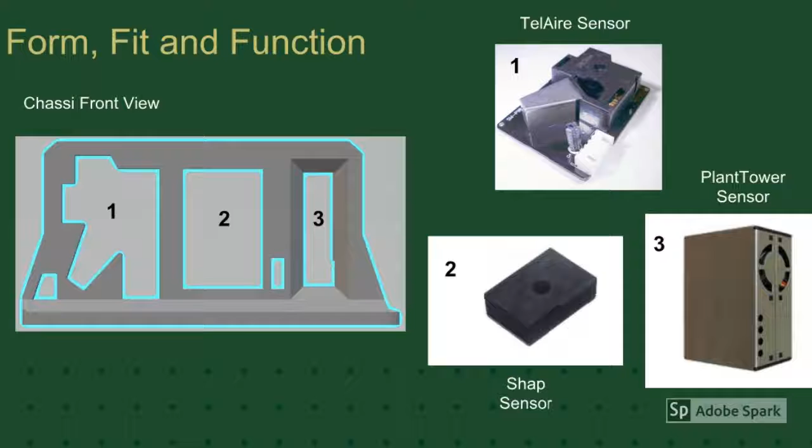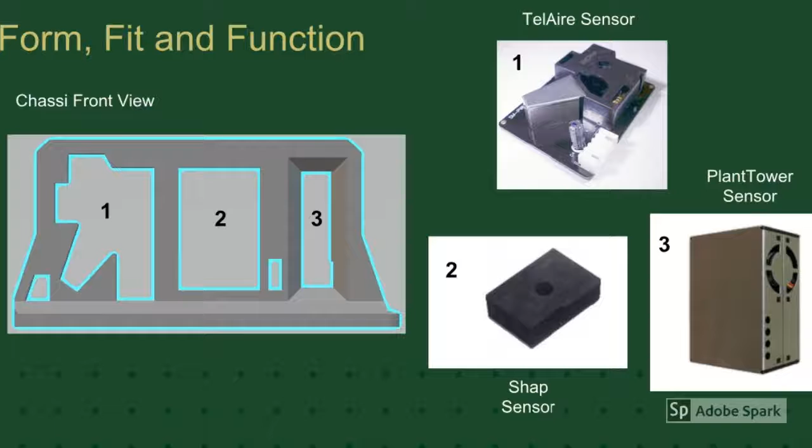Form, fit and function. Here to the left, the front view of the chassis shows where the three main sensors are located. The sensor marked as 1 was the most time-consuming to model since it has a particularly irregular shape. As mentioned before, additive manufacturing was ideal for creating a part around this sensor. The other two are marked as 2 and 3 - these were easier to model, but they still have irregular geometry.

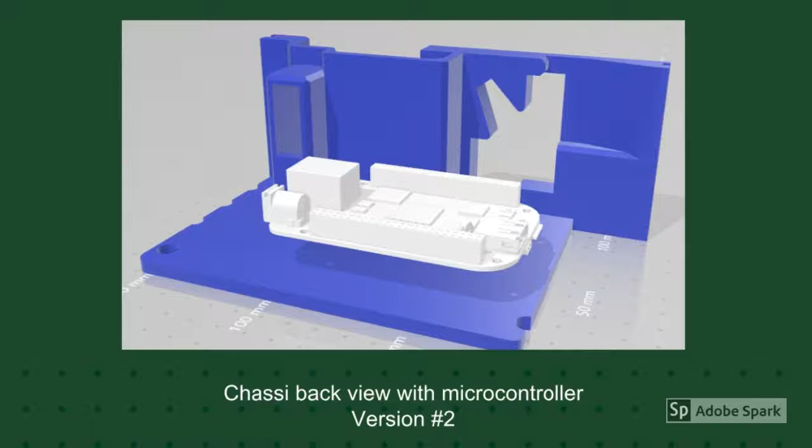In this next slide, the back view of the chassis can be seen. On the back, the placement of the microcontroller can be seen - it is the object in white color. This is not my model of the microcontroller; this model was found online. It has some amazing detail - I can't imagine how long it took for someone to make, unless they used some laser scanning to produce it.

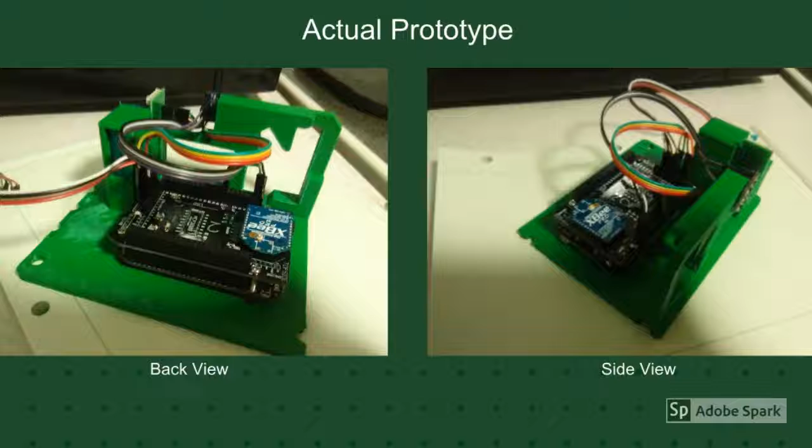Here are some pictures of the actual prototype with some sensors and the microcontroller on it. This is the final revision for this semester. The filament used was PLA. PLA was used mainly because of the cost, and because it was an easy material to work with. In addition, PLA could be used on a number of printers I had access to, from the Senior Design Lab for Electrical Engineering and a personal printer.

Features and highlights. As mentioned before, the material used was PLA.

It took around 11 to 12 hours per chassis to print with a profile of 0.15 mm, with a weight of 94 grams. The smoothness of the chassis was not a constraint, but after some experimentation, this profile was easy to work with, and it helped reduce the printing time of the units.

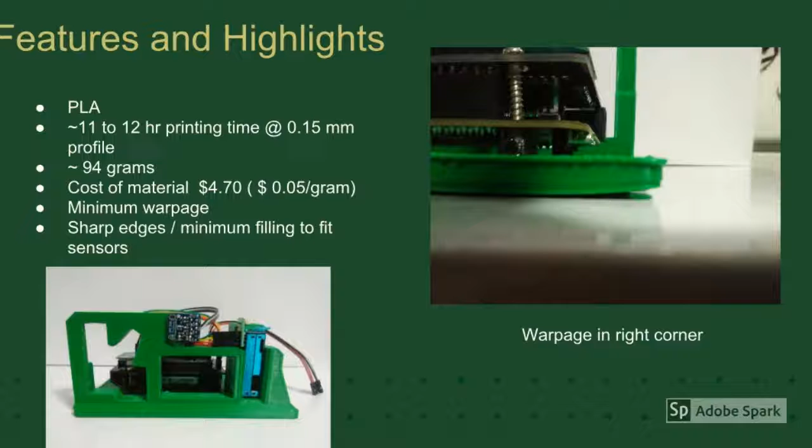Weight was also not a constraint for this project. The printing time was long for one piece, but a lot shorter than sending it to be manufactured off-campus. Time was a little more of a constraint because of the number of units needed for her project, and the deadlines.

The cost of every unit was $4.70, a cost of 5 cents per gram, well under the budget designated for chassis on the project.

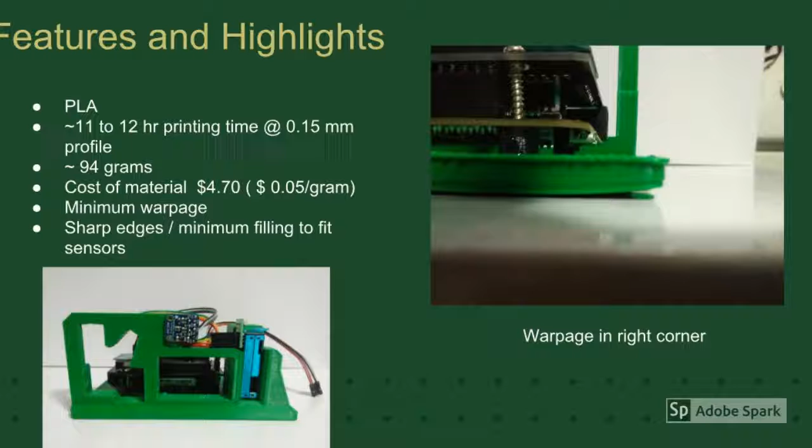There was minimum warpage on the chassis, as can be seen in the picture. I tried using different bed temperatures and blue painting tape to reduce the warpage on the models. However, the corners had the tendency to develop some warpage. It would have been perfect to have no warpage, but the amount of imperfection was not critical for the performance of the unit.

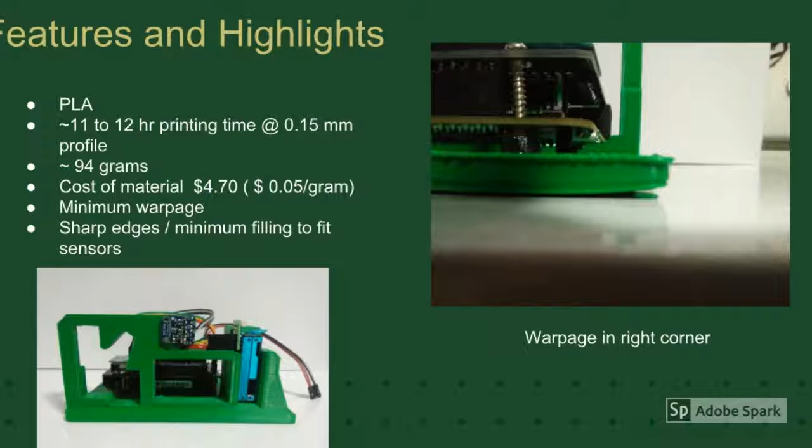The edges were sharp and required minimum filing to fit the sensors. The main reason for needing to file was to remove residual material from the supports created for the floating sections on the model.

One highlight I'd like to mention is that by splitting the model in half, I could use different printers with smaller bed sizes. I used a TAZ 6, where the model fit without a problem, a Mini from the Senior Design Lab, and my personal PowerSpec, where the bed size is smaller and the model could fit if cut in half.

As the project needed a total of 12 chassis, by doing this I could have 3 printers running at the same time, reducing the time to produce all 12 chassis.

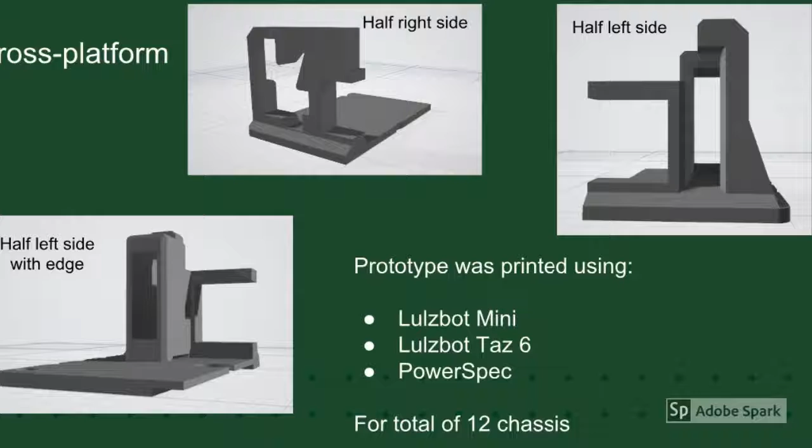Lessons learned and mistakes. Some of the mistakes I made during this project were setting the STL file resolution wrong. Too low created a pixelated model, making it deformed, and too high resolution created a very large file.

Having a large file created problems for the slicing program. It crashed every time during slicing.

Another mistake was using the wrong wall thickness. By reducing the wall thickness as a method to try to reduce printing time, I ended up creating a model that was too fragile, and the print would fail during operation.

Another mistake was to simply set and forget. During some of the first prints, I would set and start the print, usually at night. I would watch for the first 2 layers for any fails and then leave, only to come back in the morning and find a mess of filament all over the bed.

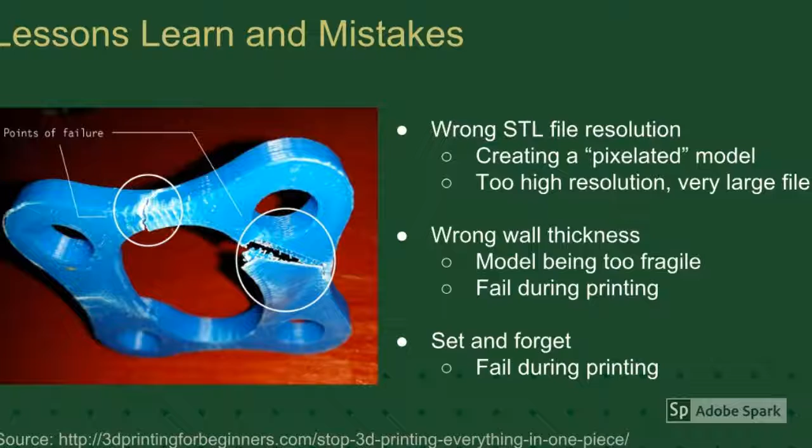Some things I would do differently if I had to make this project again: first, spend more time creating a good quality STL file, in order to reduce the time spent fixing errors later on. Basically, more planning and less trial and error.

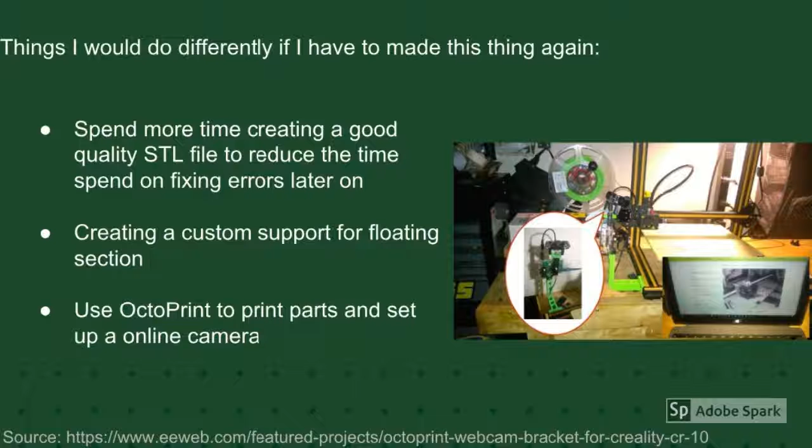Creating custom supports for floating sections. The automatic support created by the slicing program is good, but sometimes it places supports in places that could be done differently.

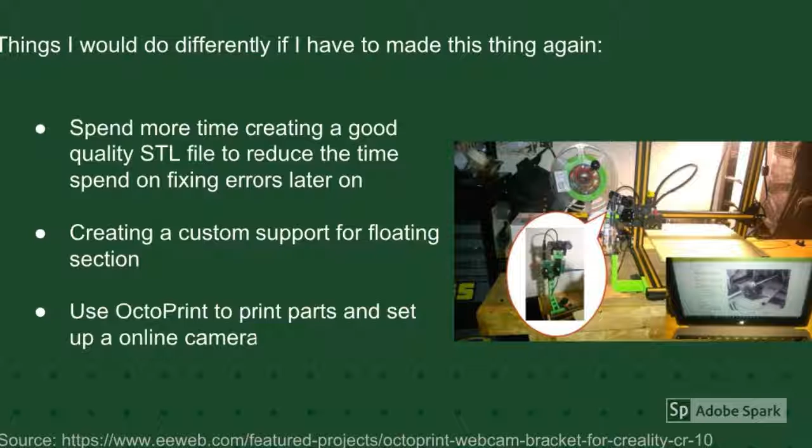Another thing I would have done differently is to use OctoPrint to run the printer. This would free up the computer, and a camera could be set up to watch the print online from another location, with the ability to stop the print if something wrong was occurring.